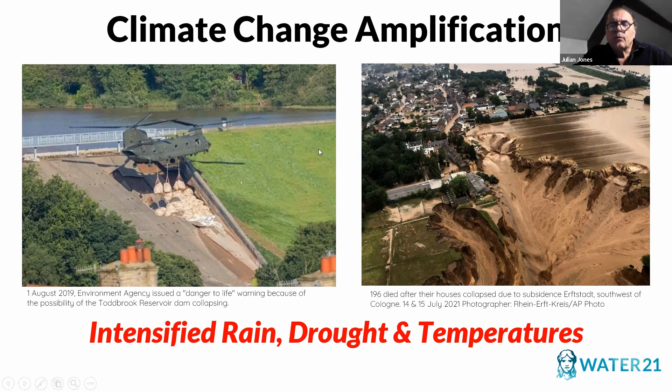Even more dramatically, in 2021, the really shocking floods in Germany and all across Europe at that time. Over 200 people died, 196 of them in Germany. And we are seeing intensified rain, drought, and temperatures. We're going to look at some of the reasons for that tonight. We're also going to look at the resolution of these extremes.

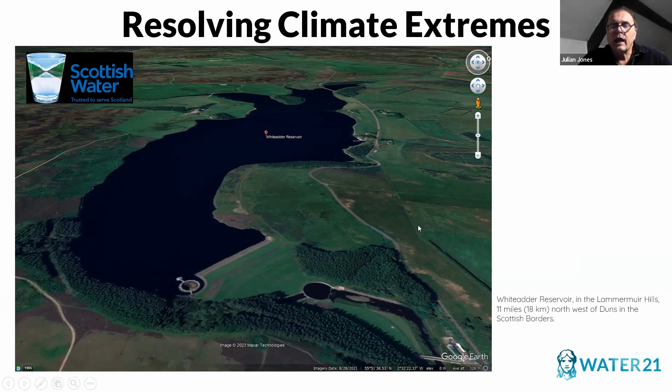Here we're looking at Whiteadder Reservoir up in the Scottish border region, one of many hundreds of earth and clay banked reservoirs like Toddbrook across the UK. And the Toddbrook episode has caused a serious rethink in terms of how such sudden inundations can be dealt with.

And just to show you one of our latest current projects, an innovative, in fact so innovative we believe it's the first of its type, solution, a siphonic penstock. Nothing too novel about that, except that we're also featuring a hydro turbine on the bottom of it to make use of the normal overspill that's available at this site.

So thank you to Scottish Water, specifically to Scottish Water Horizons, who've worked very hard over the last 18 months to get this off the drawing board, and I'm pleased to say we've just started work on the turbine. We represent Ossberger, as James explained. They're one of Europe's premier manufacturers of hydro turbines. We can see here detailed the penstock, the turbine, and the storm bypass. So an 800mm diameter bypass pipe for really very quick drain down if required.

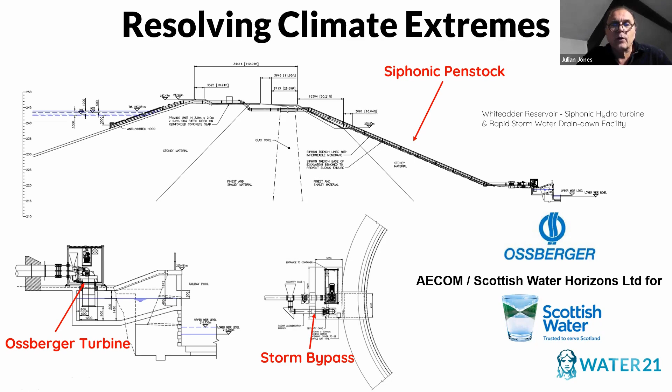I was a keen fisherman. You may wonder why on earth I'm promoting hydro turbines. Surely they're bad for fish. Well, certainly big hydro is catastrophic for fish. It totally disrupts fish passage and migration. But quite counterintuitively, small hydro is one of the best things on a river for fish for a whole load of reasons. Turbines, just like fish, need clean water and plenty of it.

In the case of the Ossberger turbine, which was a British Empire patent in 1920, you can see it's like an enclosed water wheel in the casing there. It has this air intake valve. So it dramatically aerates the water throughput.

And as you can see down in the lower left-hand corner, one of our student studies measuring that biodiversity gain against the three main types of run-of-river turbines. We supply all three. They all have a place in terms of power generation, but the crossflow is head and shoulders the best for biodiversity gain, for the simple reason that it breaks up all the suspended solids that carry the unregulated toxins that are the real cause of fishery decline.

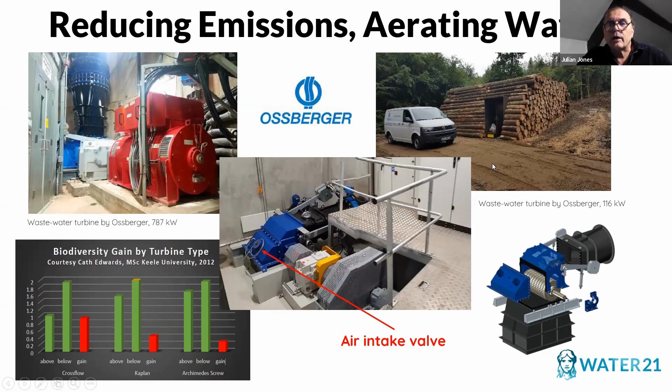Cleaning rivers is something that certainly George Monbiot would like to see done. He put out a live show, Rivercide, in 2021 from the Wye Valley, looking at the shocking decline in river water quality. Most of this is from farm runoff, but a significant amount from sewage as well.

Monbiot has other partners in trying to bring pressure to bear on improving river water quality. Feargal Sharkey is perhaps the most blunt, I suppose, is the word I'm looking for in his statements. Paul Whitehouse has a series on BBC TV at the moment. Groups like Windrush Against Sewage Pollution

really spelling it out in very hard-hitting terms about the state of our rivers, and I think driving a general public disgust with the sewage pollution, certainly, which of course is pathogenic, and also the farm waste.

There's been quite a lot of effort put into nature-based solutions to help watercourses, and of course, these are to be welcomed generally. Yeah, putting meanders back into our rivers is important. Certainly our lowland UK rivers were heavily modified centuries ago, mainly for water power, but also boat traffic.

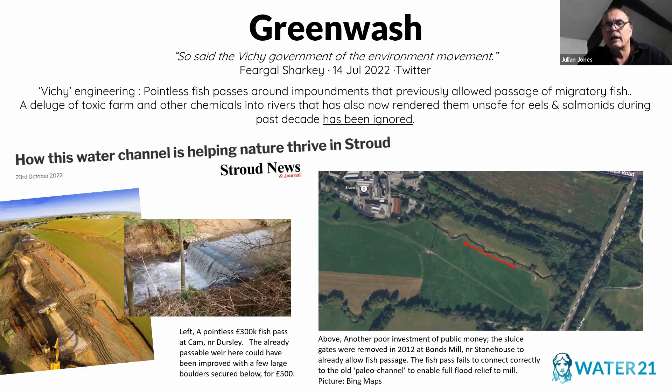We really don't have the sort of money in the public purse to throw it around like this. There are better uses of this money, probably in helping farmers get away from the really toxic practices that they've been encouraged to use. I mean, they've done what they were told. They were told that these chemicals were harmless.

Virtually all nitrate sensitive areas in the UK have failed. So even the planning to reduce these negative effects is ineffective. So the whole culture of agriculture has gone down a very dark alleyway and needs huge change. As a student of agriculture, I can tell you that actually these problems date back hundreds of years, probably to the enclosures and clearances.

You simply can't safely mechanize and automate the production of food. It needs people, and we need people. People need meaningful lives and work doing this. We'll come back to this a bit later in the presentation.

Turns out that this cheap food actually isn't even cheap. Some great work by the Sustainable Food Trust, taken forward now in a great book from Routledge, looking at the true cost of our food.

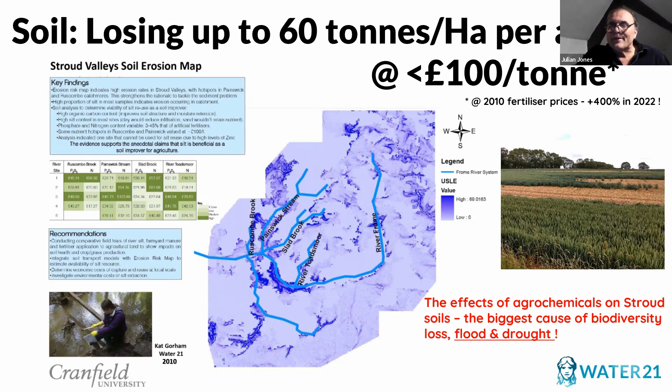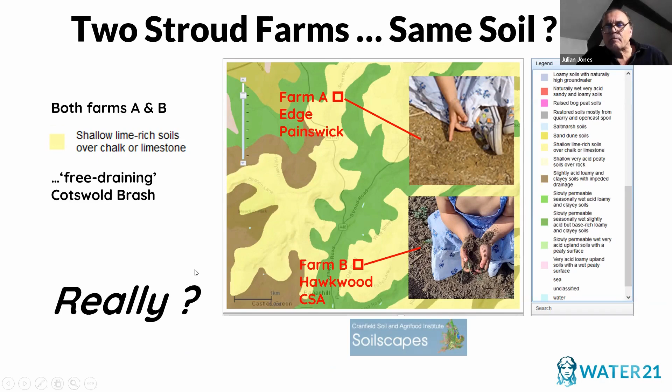So let's take a look at 2 farms in Stroud, both according to the Cranfield Soilscapes data on free draining Cotswold brash, Farm A and Farm B. My 3-year-old daughter helping me, as you can see, to analyze what's going on. So Farm A, a chemically farmed area of land.

So with glyphosate, there's a double application. Just before harvest, the crop is sprayed. And then after the harvest, that is when they then blitz the field again with glyphosate to prepare it for the next crop and kill all the weeds.

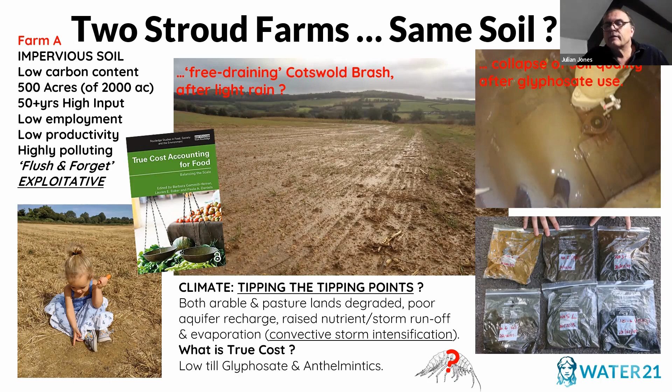In terms of pasture management, we have serious problems there as well. The wormers or anthelmintics that farmers use, over-the-counter medications that they can just buy freely. These pass right through the animal. And so cowpats, for example, no longer degrade in the same way that they used to. They just sit and set hard in the sun. They no longer have bugs in them for the badgers to pick over and spread the manure over the pasture. And when it rains, this manure carrying the anthelmintic residues just runs into the river.

So much for conventional chemical farming. Here's a man, Jake Freestone, who I've met a few times, between Cheltenham and Tewkesbury. He manages a large estate, and he is converting now from glyphosate-based farming. He believed the marketing hype that this was good for the environment. I mean, it wouldn't. If you want to check out a bit more about glyphosate, just Google the Monsanto papers and you'll be shocked. But that's just looking at human health.

But Jake found in this shocking summer that was just gone, 2022, a 10 centigrade temperature difference between those fields where he's still using normal chemical farming and those where he's reverting back to more traditional farming methods. So when you consider that probably 90% of arable farming in the UK and the rest of Europe has gone through this temperature change through these farming methods, you can see now, and it's not controversial to say this, the amplification of climate change is really coming about.

There are other factors as well, of course, and when we get a fixed high pressure system over Europe, temperatures are going to get unbearably high. Not a lot that civil engineers can do about this. You're doing your best to deal with the effects. There are measures in the landscape that can be done in addition to going back to traditional farming. Incredibly, as an irrigation man, I can tell you that just storing stormwater and irrigating with it can double food productivity. So there are really very simple solutions.

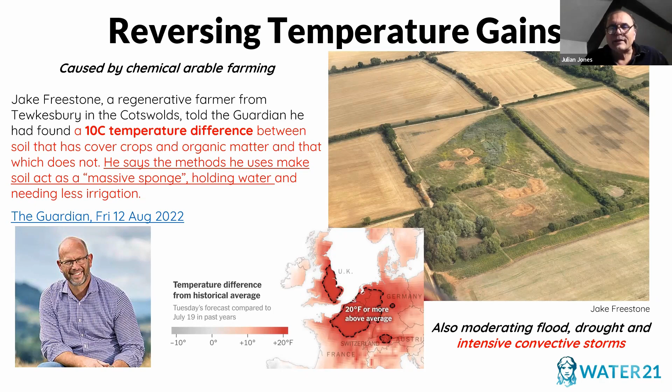During that study, we approached the farmers in a 14 square kilometre catchment that we were working, and almost without fail, 90% of the farmers welcomed the opportunity to have some stormwater attenuation. They could make use of it. One dairy farmer, I asked, would he have a stormwater lake to help protect the people downstream? And then he'd have some water to irrigate his pastures during dry spells. His answer was very wise. He said, yeah, of course I would want it. But he then went on to say that they won't allow it. That may be a follow-up in the Q&A, but moving quickly on.

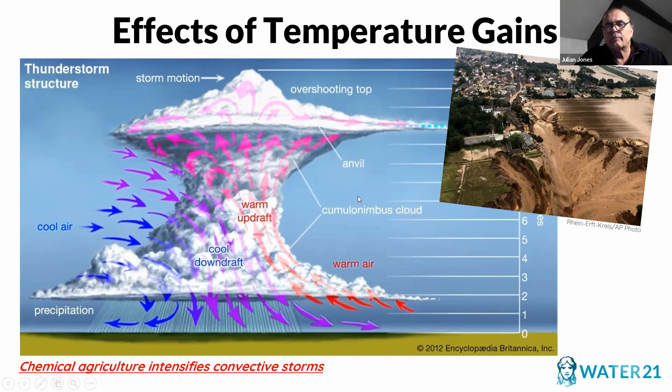The intensification of convective storms is easily understood. These are driven by warm air and moisture. A catastrophic storm event in Germany was in a region surrounded by chemical agriculture, here and at many other locations around the world. Let's carry on our little farm tour in Stroud. We're going now to Farm B.

I don't want to leave you depressed that we're not going to be able to feed the world. We can feed the world, but it requires extreme care and diligence to farm without chemicals. It's a real calling. And there are people who want to do this. And it's more akin to gardening. And it's best practice at a small scale. The productivity of an allotment is orders of magnitude higher per square meter than a large-scale farm. So that really is how food should be produced. And this is really taking us way back to 250 years ago, before the enclosures, letting people back on the land.

We can't convert to organic overnight. They tried that in Sri Lanka, and it was a catastrophe. It takes at least 10 years to make the conversion. You need to stack enterprises. You need people on the land. You need to create a symbiosis between all the practices. Animals have an important role. There are vegan methods of doing this. There are a few vegan practitioners of effectively zero input farming.

And other than trace minerals, which have been washed out of the soil, which can be recovered from seaweed, for example, or volcanic rock dust, that zero input really forces best practice. And as I say, if you store the rainwater, that productivity can be boosted. And my little daughter, they're very happy at the handfuls of rich, absorptive soil on this farm after just 20 years of compost applications.

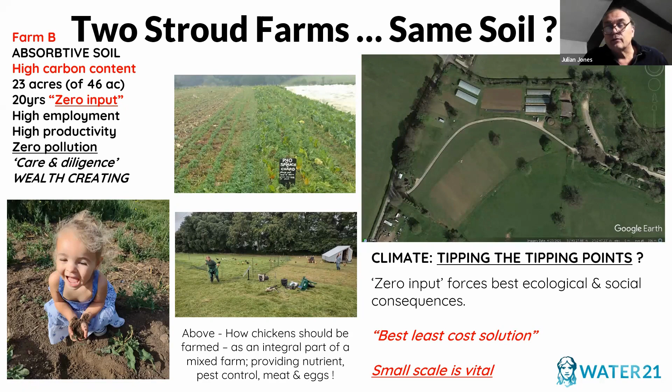The French government at Paris COP proposed a very elegant solution to the world's emissions. I think a very rough calculation on their part was that just 0.4% of return of carbon to the world's farmland per year could account for all the world's emissions. Well, it would put a lot of chemical companies out of business very quickly, and certainly academia had been looking in a different direction. This paper here, which I reference, and the link for all of these references will be in the PDF circulated after this event. Yeah, they roundly criticized this French proposal.

But if you dig into that paper, you'll see there's just one reference to compost application. And surprise, surprise, it didn't return 0.4. No, it actually returned 3.6. That's nearly 4% soil carbon a year. So yeah, it can be done. But it requires a huge cultural change. And that's not going to happen overnight.

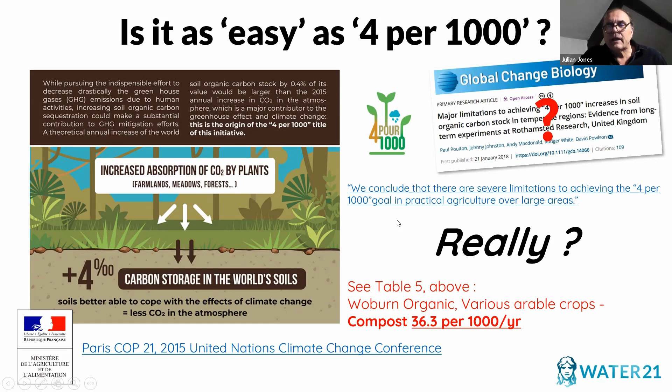It can be done even in the center of the Sahara. So that storage of rainwater, this is in Darfur, an annual rainfall of less than 300 millimeters, but that is sufficient by impounding inline impoundments. We couldn't do this in the UK, but we can make offline impoundments, which have the same benefit. Just by trapping that water, storing it in the catchment, getting it out on the fields, those fields green because they're sequestrating carbon out of the air,

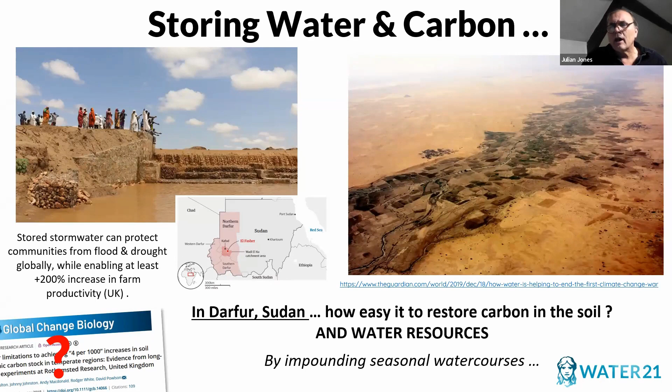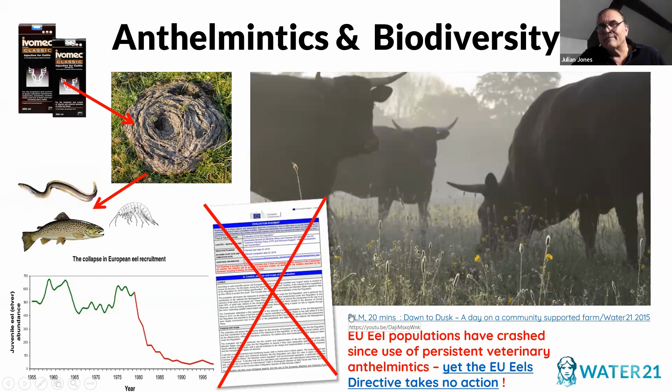atmospheric CO2. I've already mentioned the appalling effects of anthelmintics. Incredibly, this one, ivermectin, is a fermentation product of a soil bacteria, which normally is part of the soil microbiology that sequestrates carbon out of the air. And we put it back onto the land, and it's no coincidence that fisheries have collapsed coincident with its use. And surprisingly, the Eels Directive makes no mention of this. It looks at other solutions to restoration of eels.

Many of you watching tonight will be aware of working with hydrographs to determine flood control, typically 20 descriptors: soil type, landform, local rainfall, etc., channel capacity. These are the empirical criteria, of course, which any flood engineer works with. And the good news is we can change those criteria. So at the moment, the soil data, I would say, on most flood planning is hopelessly out of date, but we can improve that soil data. We can plant forests, we can put ponds in, reservoirs, etc.

So actually, we don't need political oversight of this. We just need honest engineering based on neutral and unbiased numbers. We're not there yet. What are those neutral and unbiased numbers? Well, they relate to critical risks, temperatures, we've already talked about, public health, we're going to talk a bit more about that in a minute, emissions, sequestrations, flood frequency, changing the hydrograph, retaining water in the land to moderate oceanic rises, biodiversity loss, biodiversity gain.

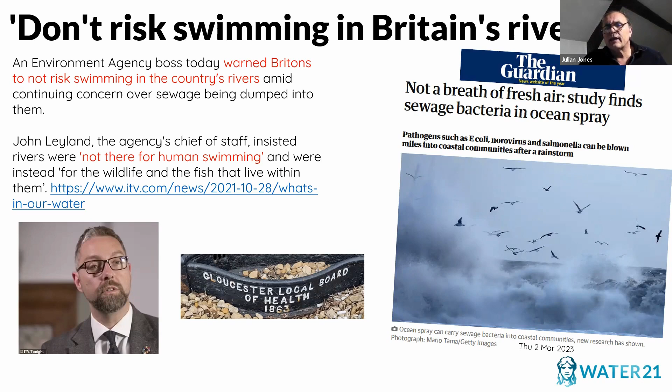And my concern, dating from my days being the king of the muck spreaders in the UK with Bauer, we were spraying pathogens into the air with our muck spreading equipment, and then the realization that every time it rained and the sewers overflowed into our rivers, weirs were spraying fecal particulates over adjacent communities. Took a step forward only in the last week with the publishing of data confirming this. California, I think it was, fecal pathogens blowing inland just from the spray from the waves at sea.

This has been known about, of course, for a long time. You're not a competent sewage engineer if you don't understand risk from fecal particulates, and you're not much of an engineer if you don't understand that a weir generates a spray during flood or spate conditions. I'll leave it at that. There's a paper you can look at. It's a 2006 paper.

Some images there from Stroud. This image here actually is seagulls feeding on feces as they come up in a field in front of the local environmental health officers. I actually had an involvement in this because Severn Trent were very good at the time of privatization, and I've worked on and off with them closely through the years. They agreed to absolutely not let any pathogenic material into the watercourses. And so it was let go of in the field in front of the council office, who at that time were simply loading more and more housing onto the sewer network. The image lower right is the current situation.

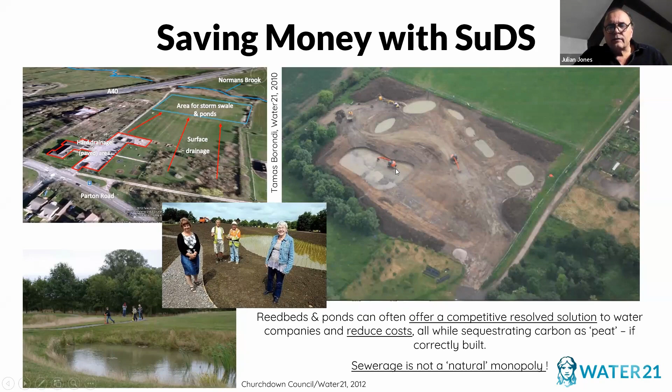But SUDS as a methodology has taken off. It's widely used. We have a government SUDS policy and plan now. There are huge benefits, even from gravel, frankly. Just don't aerate it or oversize it. But I'm going to come to the correct solution in a minute. This is one of our student projects at council offices and parking area, all stored within this, saving them many thousands a year in surface drainage charges.

This is another project. I didn't build this, but this is quite interesting because an error on the part of the water retailer in this area caused a billing rate of £7,500 a month for this 5-hectare site. That creates an interesting economic model, because if you consider that actually less than 10% of that site is water attenuation, £7,500 a month for, what should we say, half an acre, something like that, is good money if you can get it. So we have seen a situation where water companies, for a variety of reasons, are failing to effectually drain the areas they're responsible for.

We are seeing this huge upturn in public awareness of these issues. Certainly this school were enraged to get the bill because they understood really just how relatively cheap it is to store storm water. At £7,500 a month, they could have been building several of these systems a year. If they could do it, frankly, any landowner down the run of the sewer network from this area could and should be able to get into this competitive market. That's part of the legislation behind the privatization. Common carriage, as it's called, works perfectly well in electricity and telecoms. Water is just as easy to meter.

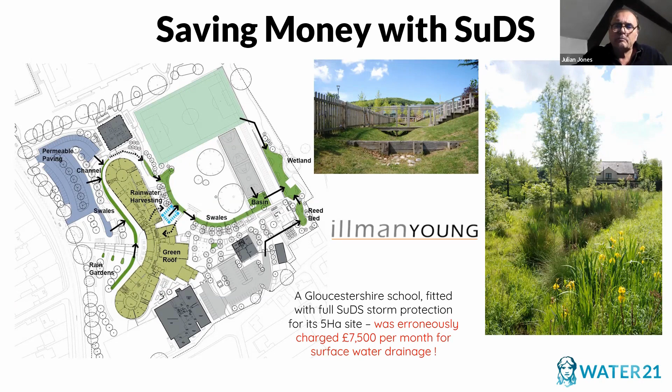Picture there of Bill Blake. Bill continues to be now a friend and a close advisor, part of Water21. For many years, he was the senior pollution control manager for Stroud. He's been retired now for a long time.

But in the early 90s, a lot of the smaller sewage works, as a benefit of the privatization, came up for renewal. And at Avening, we had the problem that there were very low summer flows in the stream, and the majority of the flow in the stream was made up with treated effluent. And Bill understood about reed beds, and he imposed such a tight ammonia standard that a reed bed was the only way, a gravel reed bed, which has worked very well.

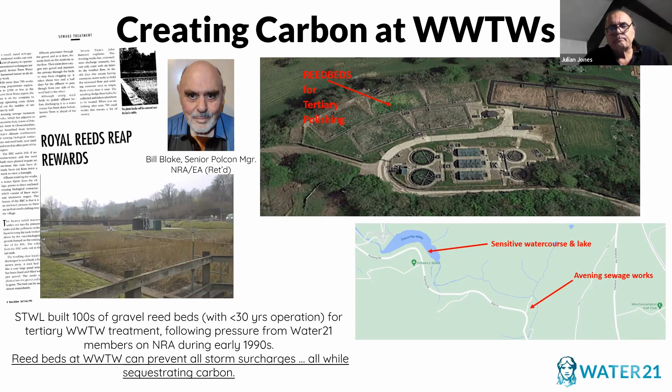It's almost impossible for there to be a pollution incident at this particular sewage works, or indeed any other with a tertiary polishing reed bed. Severn Trent built hundreds at smaller sites following this.

I mentioned that I had a very positive relationship at a high level with Severn Trent, and by 2003, their understanding of the need to do something about storm surcharges from CSOs led them to ask me to draw up some plans for a pilot for putting reed beds on CSOs. Incredibly, party politics in Stroud prevented it happening. So it was backed by the MP, who was a different party to the council. We tried promoting it through a local water group, and that was led by another party.

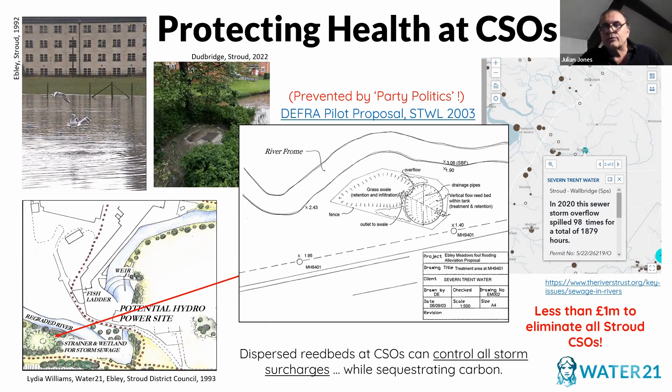They wanted the sewers all relined, which has led now, as if you just keep passing the problem on downstream, eventually something's going to give. CSO discharges happen typically 100 times a year in Stroud now. There used to be over 50 CSOs. They were all rationalized down to a small handful. And you'll get quite a big variation in rainfall across a catchment like Stroud. But if you reduce the number of CSOs, then the frequency of discharge at any one or other is going to increase. So we now have a £25 million refurbishment going on.

It saddens me. I think Severn Trent did their best in 2003, but we have colossal delays with our traffic now. It's a huge cost. My estimate in 2003 was that we could permanently resolve storm surcharges for less than £500,000 then, maybe less than £1 million now. And I believe that the new sewer enlargement will still feature overflows.

I dug into some of my old references from many years ago. Forgive the poor quality of the graphic here. But one of the unique features of the Stroud sewerage network is the very high head differential, upwards of 200 meters head differential. We could actually run some hydropower off this, and we would have to use some of these great inline screening technologies that are coming out now. When we looked at doing this in 2003, these weren't available. We were just looking at disposable sacks to capture the trash. You don't want the trash going over the reed bed. This design of reed bed, a vertical flow reed bed with a swale.

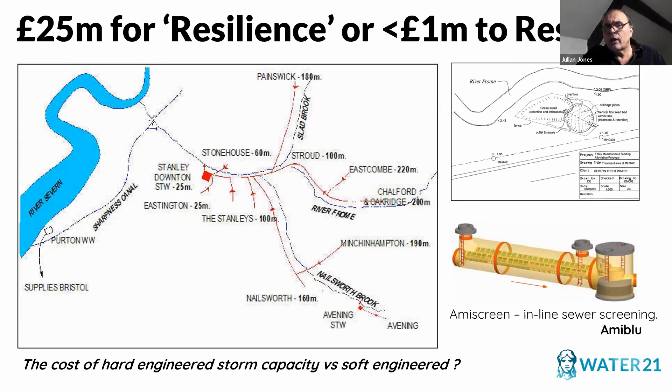Just at the moment, I'm working on a very high profile project. I won't name it. It was a project that was put in 30 years ago. It's coming up now for refurbishment. In the last 30 years, the population that it's treating has gone up 400% over the original design criteria. The reed bed's failing, but the swale, which in this case is planted with willows, is working just fine. We have a few 100-year-old withy beds or willow wetlands working on sewage dewatering still to this day in Gloucestershire.

This was another student scheme, 95. This was an unsewered village when we did the scheme. The village asked us to look at this solution. So a combination of reed beds and biomass plantation. It turned out with an additional 60 acres of biomass, which would have taken the sludge from the septic tank, we could have produced 100% of the village's potential domestic energy for just £25,000. They ended up with a pumping station, of course.

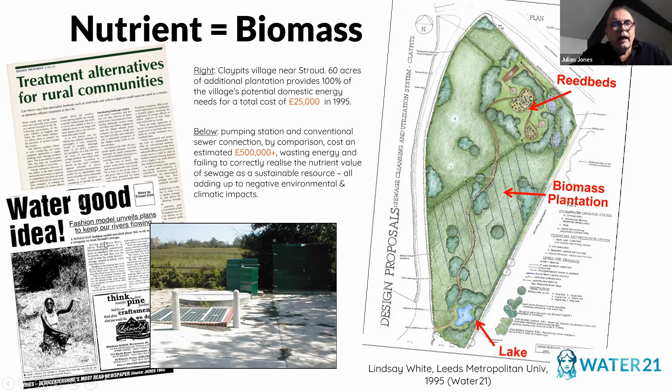So he may want to step into the Q&A, and James, if you let him, I'd appreciate it.

Frankly, horrendous. I'm not going to go into the reasons why now. Suffice to say that Lucian has built hundreds of these systems around the world, including, I believe, most of the world's largest, certainly the largest in the UK.

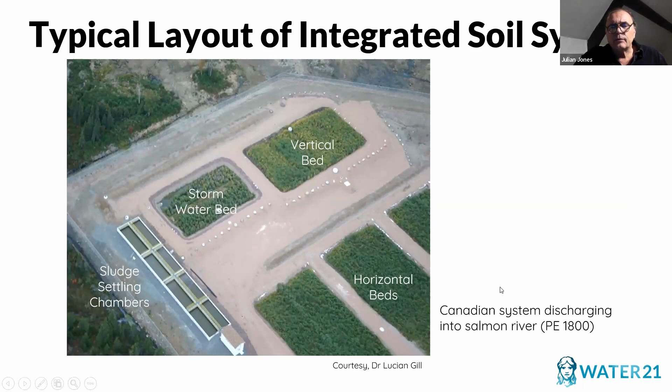This is a Canadian system for, I think it's 1,800 people, soil-based, of course. Typical performance of Lucian's soil reed beds, the upper 90s of reduction of the pollutants. Phosphorus, which is a major issue. I mean, he introduced it to the appropriate government agency in 1984, 99.6% reduction in phosphorus.

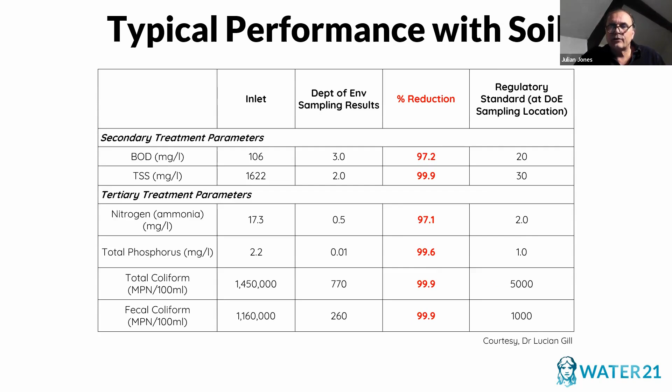Sadly, Sudan suffers regular warfare and civil disruption. So whilst the systems are still working and incidentally providing water for millions of people from heavily contaminated oil waste with no traces of hydrocarbons, the wider scheme that he had in mind for a post-oil economy based on plants hasn't been fulfilled.

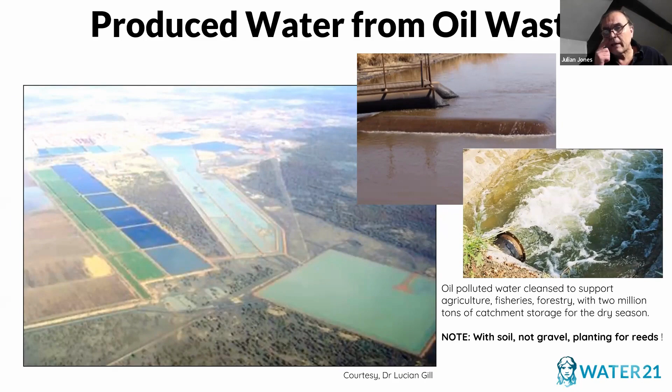Better start to move on. I think I'm probably running out of time, but just a few more slides to go.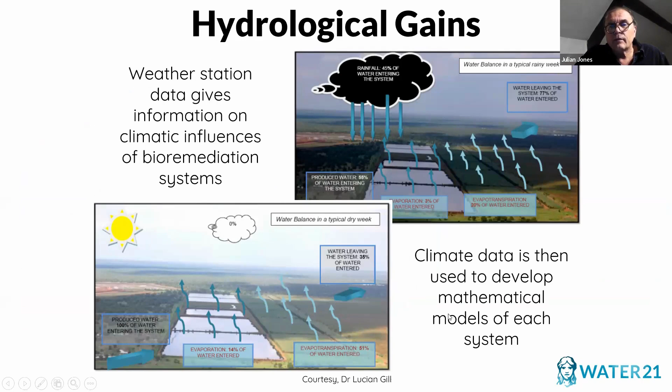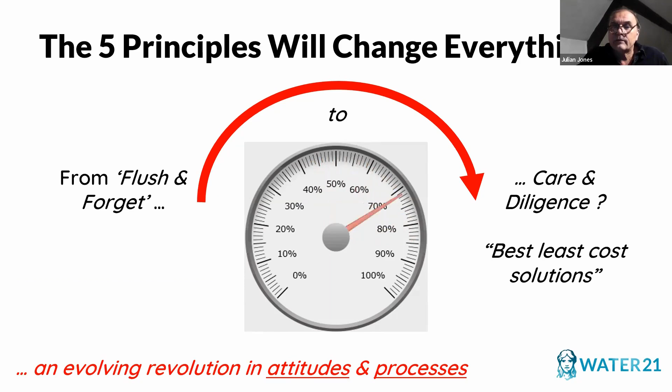I'm very excited at the possibility that we're actually now, largely through the economic problems, but also this wider awareness, moving from a flush and forget society to one based on care and diligence, where best least cost solutions can be applied to the greater benefit of us all and the environment. Thank you very much.